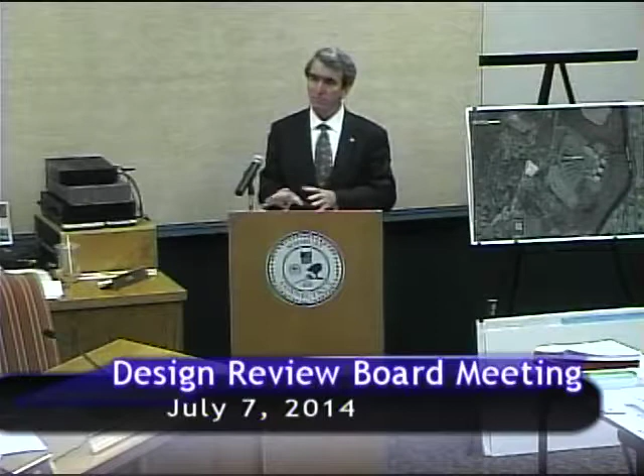I think what's critical in this proposal is Mr. Evans's attempt to retain the old pool barn store as opposed to just taking it down. Dale has spent a lot of time with the architectural design, and he'll walk you through that momentarily. We've come up with a proposed mixed-use development utilizing the PAD section of the zoning regulations. But to really make it work, the Cumberland Farms component has to go with this, just from a financial sense, otherwise we wouldn't be able to preserve the pool barn store. I just wanted to preface our presentation with that, and with permission of the chair, I'll turn it over to Guy Hesketh. Thank you.

Thank you. Is that okay to have this set up here? Sure.

Good evening. For the record, my name is Guy Hesketh. I'm a licensed professional engineer with F.A. Hesketh and Associates. Our corporate offices are located in East Granby, Connecticut, and we helped Tom Evans with the application package and the plans that you have as part of that package.

What I'm showing here on my left is an aerial photo with the site overlaid on it. You can see the colored portion is the site plan, which I'll show you on a larger scale in a minute. It's located on Hopmeadow Street.

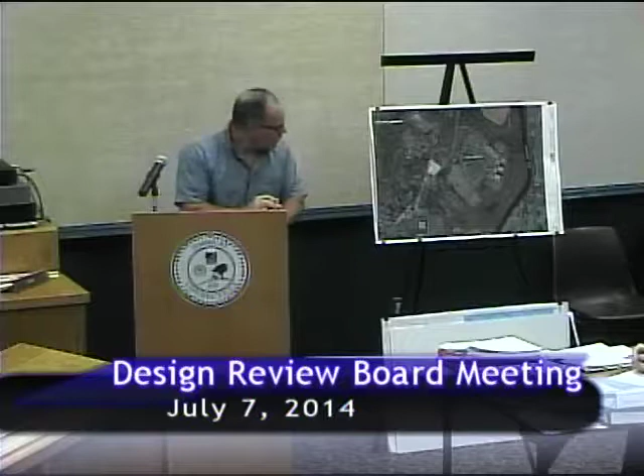It's on the site of the former pool and patio barn that was in operation, I don't know, maybe up to 15 years ago or so. Behind it is the Farmington Canal Heritage Trail, the rails-to-trails, so you can see that in relation to our property. We're sandwiched in a sort of triangular piece between the trail itself and Hopmeadow Street. I'm showing the Hartford across the street from us; you can see the scale of that. The Farmington River is located further to the east of our site.

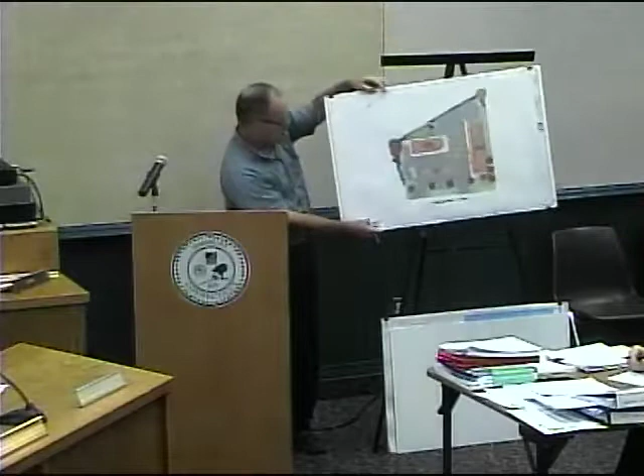North is not directly, but roughly upward on the page. So that gives you the scale of our project relative to the neighborhood and our location. I've got a rendering here at a little closer scale of the site. It's 155 Hopmeadow Street, a total of 1.87 acres. It contains the pole barn building, located here. Currently the site is cleared, with some gravel parking areas in front of the pool barn and a little bit around the back.

There is a drainage swale which runs around the property. It picks up some runoff from Hopmeadow Street, goes between us, and there's a synagogue located here to the south, and kind of circulates around the site along the western edge of it, I guess you'd call it.

That ditch was probably part of the former railroad, and it was incorporated into some storm drainage that the DOT uses to drain runoff from Hopmeadow Street and go around the site. And then, of course, the rails to trails, the Heritage, Farmington Canal Heritage Trails, is located right here.

What we're proposing is to do a restoration of the pool barn building. In addition to that, I have a new convenience store located here, and then a proposed canopy for fuel dispensing.

The existing pool barn, we're proposing 2,400 square feet of retail with up to 3,320 square feet of commercial, and that would be a combination, Dale will explain that in a minute, of this portion of the building, which will be mixed use. It could be a combination of apartments or some type of studio apartment with some space downstairs, whether commercial, office, retail, artisan type of thing.

One of the things counsel will talk about that we're requesting in our application is that the maximum width be allowed to exceed the 30 foot at the property line and the 40 foot at the curb line, in order to accommodate the radii transition required between the driveway curb line, which is this line here, and the curb line on the state highway.

And we would leave that because this is a state highway, these applications will require review by the Connecticut Department of Transportation, and it's at their discretion from a public safety perspective what radii they want. So we're asking to allow the transition for the radii. We're requesting up to 60 feet on our plan, showing widths of 35 and 45 feet, which we believe are adequate for the DOT.

However, this gets flushed out in the encroachment permit process you have with the DOT. Unfortunately, they won't do a review until there's action taken by the town. Once that's done, we will submit those to the DOT.

We are proposing paved parking areas on the site. You can see them shaded in gray. There's also a couple other little amenities that we have here.

Cumberland Farms has in this location an air dispenser. They're required, when they sell fuel and have this type of service, to provide air for tires. They're going to have a small box located at the edge of the parking area and a crosshatch area that will allow patrons to come in free of charge and use the air if they need to put air in their tires.

We're also providing, and showing on the plan at this location, some electric recharge stations for electric vehicles. We think in reality they'll end up located somewhere on the site, but for purposes of showing we're committed to having electric recharge stations, we're showing a location on the plans. That's something a lot of towns are starting to lean toward. It's not specifically required by your regulations, but it is a best management practice, and the applicant wants to do what's right for the long-term future.

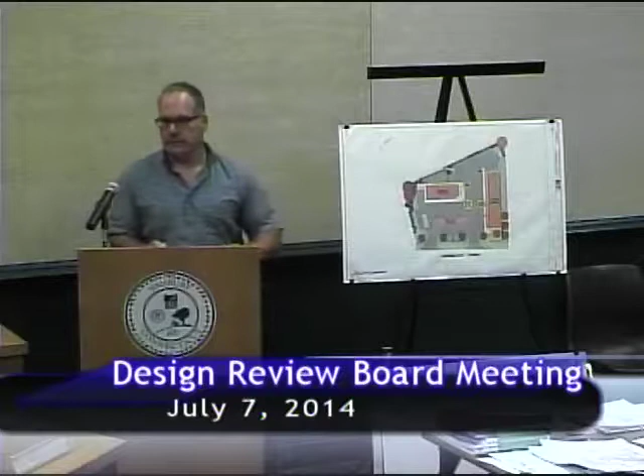Regarding stormwater management facilities on our site, we have a number of catch basins located to pick up runoff, which will be captured in an area we're calling our water quality basin, located behind the facility. It's shown in more detail on the grading plan as part of your package. What that does is receive stormwater runoff, then throttle it and discharge it at a reduced rate into the intermittent water course located behind the property. That basin is sized to capture and treat the minimum water quality volume.

As part of our stormwater management system, we're also locating, in this area and another area here, hydrodynamic separators, which are concrete structures designed to do two things. They capture and settle total suspended solids to meet the 80% total suspended solid removal requirement or recommendation of the Connecticut DEEP. In addition, they have the ability to capture and contain floating product, including hydrocarbons, from any of the areas of the parking lot. So it's designed to handle those types of things.

There's a number of erosion control devices that we're proposing as part of the project. I won't get into detail on those unless you have specific questions, but those are shown on the grading and sedimentation erosion control plan, GR1.

We've also included in our package some site lighting photometric analysis showing the type of lighting we're proposing. There are a number of perimeter lighting fixtures at a 14-foot mounting height, and pedestrian level lighting at a 7-foot mounting height. The other lighting proposed for the site is the canopy lighting - a number of fixtures under the canopy designed to provide lighting immediately under the canopy for better visibility during fuel dispensing. Also, immediately under the walkway canopy for the main store entrance, there are some canopy fixtures. Details of those fixtures are provided on the sheet included as part of the lighting package.

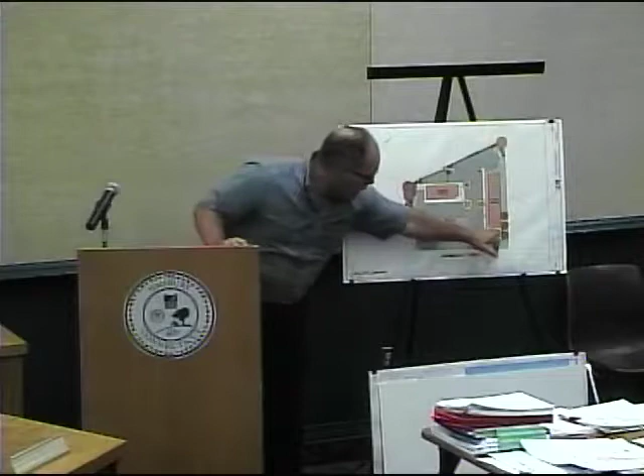And then Mr. Cutler designed an area here - an outdoor patio area. The existing pole barn building extends into this area, and we would be removing a portion of that building. We anticipate a portion of the foundation would remain, and there would be a garden patio area located here in the front. We don't have exact species of plantings for that area yet, but the perimeter vegetation we're showing on the plans, along with species lists, is included in your landscape plan.

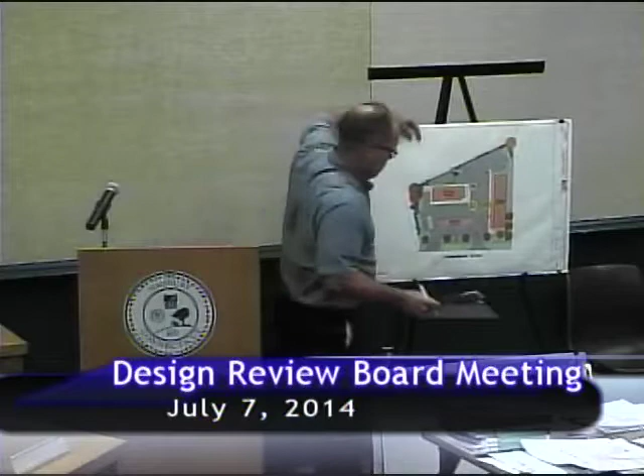This is the only way to rescue the farm, like having a gas station next to it. I don't like having the gas station next to the farm. This is the only way to rescue it. That's what I...

Good evening, for the record my name is Dale Cutler. I'm a partner in the firm Kenyon and Cutler. Our offices are in Avon.

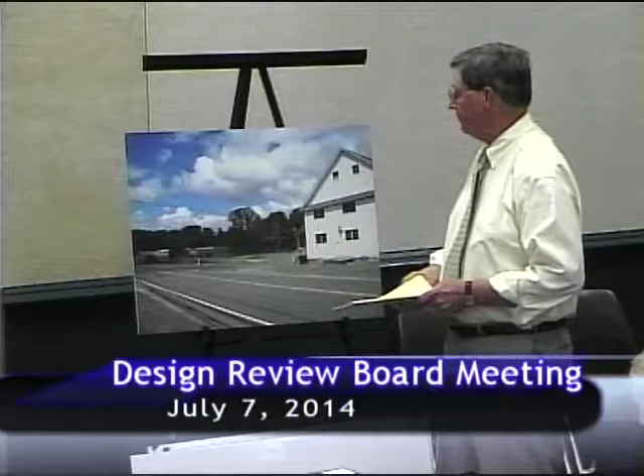My primary responsibility on this project has been the adaptive reuse of what we all call the pole barn. The structure was actually built in 1911 by American Sumatra Tobacco, and it was one of their primary warehousing facilities. The cured tobacco grown in the Simsbury area was brought to this building after it had been cured in the sheds, and here it was made ready for shipment over the rail, given its location next to the railroad. The building itself, because of its nature as a warehouse, is very, very sturdy.

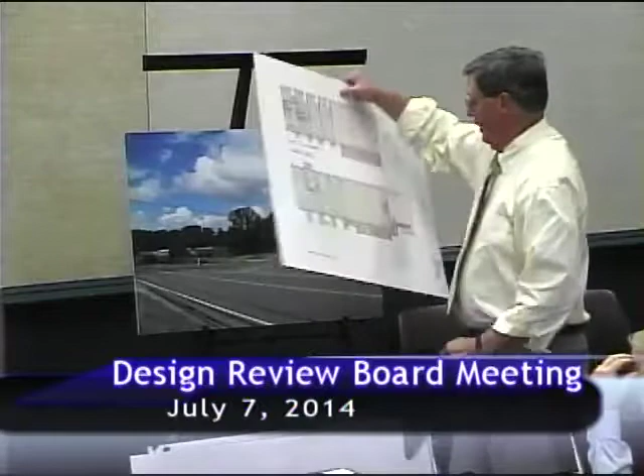The interior structure is a very heavy timber frame. This is actually the first floor plan. You can see the columns are located 10 feet on center. This building will hold like 400 pounds a square foot. It's built like a tank.

One of the nice things about it is it's been fairly well preserved over the years. The exterior skin has been kept intact, so although it's over 100 years old, it hasn't really suffered much from the weather. Part of that is because Mr. Evans has used this for storage for some of his collection, which is a very eclectic collection. But because of that, it's a very secure building, and it really lends itself to the adaptive reuse we're anticipating here.

As Guy mentioned, the existing building, which we're all familiar with, is about 4 feet from the highway taking line at the front wall. That creates all kinds of situations, not the least of which is a very bad sightline coming from the north. It really does mask anything, entrance and exit to the site, and makes it kind of an unsafe condition.

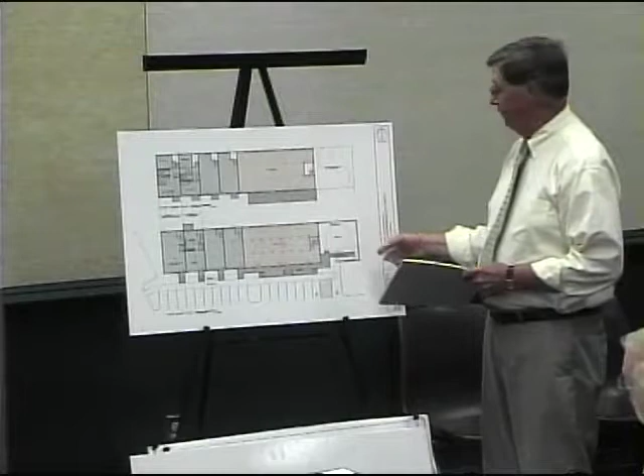So the intent of the proposal here is to remove the first 4 bays of the building, or 40 feet, which is from this point to this point. If you go out there and look at it, it's the portion that has the porch on it now, so that will help you imagine how far back it will be set from the road.

But also, as Guy mentioned, we're going to retain the existing antique brick foundation that occurs there and actually use that as a garden wall. I think that'll be a very nice feature as an adjunct to this. It could be an adjunct to some of the uses within the building, or could be used independently, related to the bike trail.

The use of the building, again as Guy mentioned, the eastern portion of the front towards Hopmeadow Street, half of the building, is intended for retail uses, either a single tenant or multi-tenant. We've provided handicap access with a ramp and a covered porch out front. The other portion of the building is really a mixed use, a combination of commercial office and residential in this half of the building.

On this plan, which I think you have copies of in your folder, it shows a couple of different ways this could be developed. As we take one of these bays, the initial thought is that the lower floor will be devoted to either a commercial use, like an office or an artist studio, or a number of different uses. The upper floor, as shown here, is a one-bedroom apartment, with the whole thing held in common ownership or common rental.

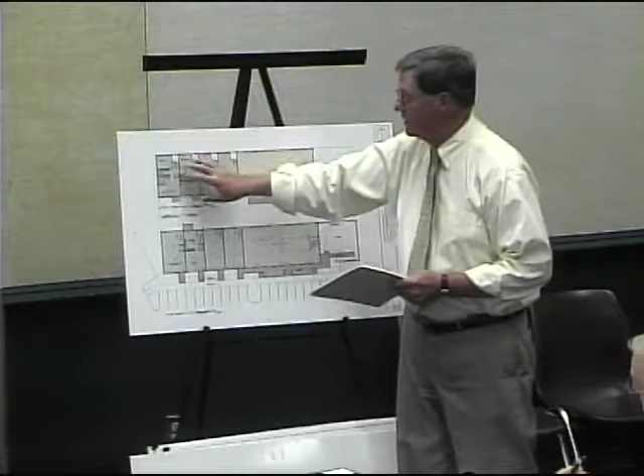One of the other alternatives is that we could take that same 20-foot by 40-foot footprint and turn it into a very nice two-bedroom townhouse as 100% residential use. Either of those two uses, whether commercial office with residential above, or all residential, are adequately supported by the parking shown in the proposal.

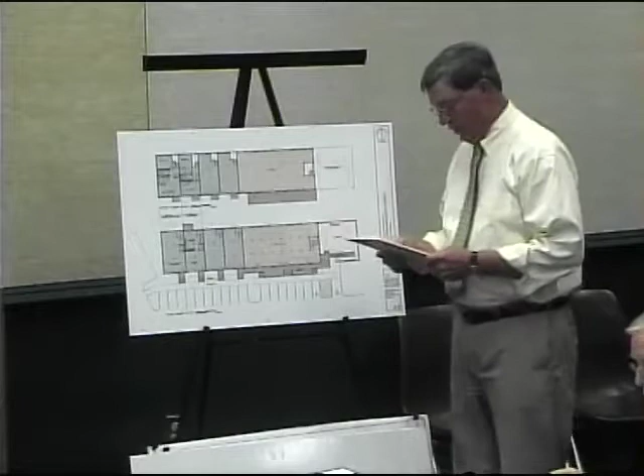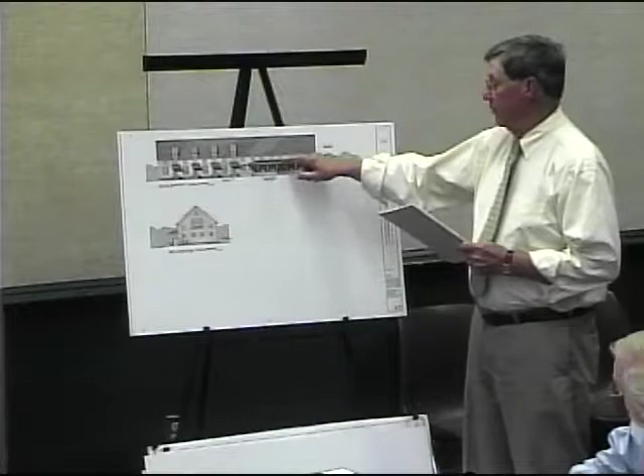Major materials: there is an existing fiberglass shingle roof that'll be retained as much as possible. The roof over the retail section would probably be a metal roof. I'm showing it here as a dark green metal roof. The general material on the exterior of the building would be horizontal lap siding, more likely than not a fiber cement product, which is what everybody's using these days, because of the durability, and probably pre-finished, which gives a nice lifetime warranty on that finish.

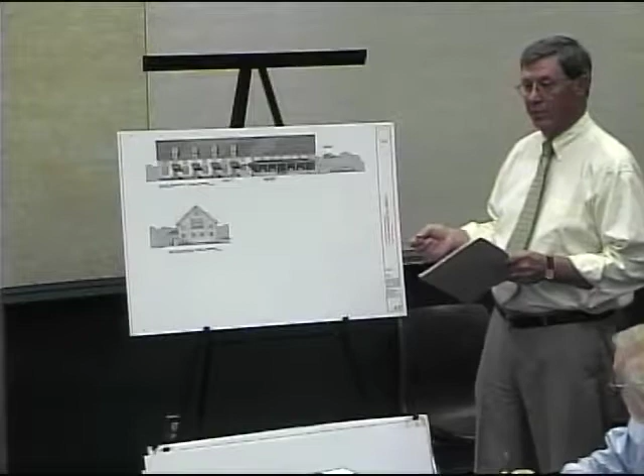So I don't know if you have specific questions with regard to the barn design. I'd be very happy to answer them, or we can move on and show you the proposal for the convenience store. Okay, why don't you move on, and then we'll ask all our questions at the end.

Just to segue into that, we did have prepared a rendering. This is the new end elevation of the pool barn. This is actually the terrace area that we talked about towards South Meadow Street. That's an accurate representation of the canopy that's being proposed.

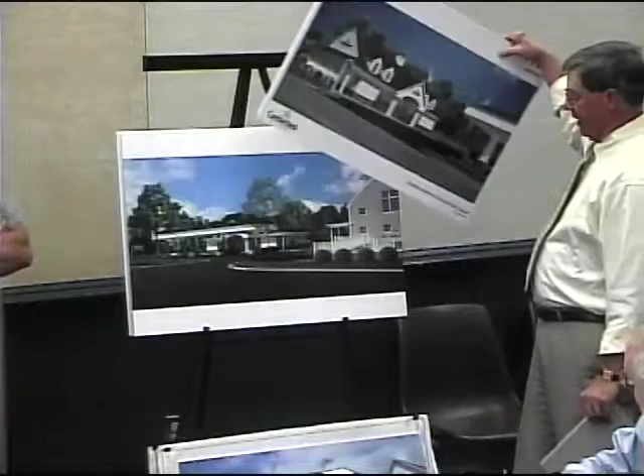This is a representation of the convenience store. That gives you a real good idea. It's kind of a replay of this, so that gives you a proposed before and after. A little bit better illustration of the Cumberland Farms, which was not our intent in doing this rendering. Our rendering was trying to show accurately what it would actually look like. This is obviously rendered to scale.

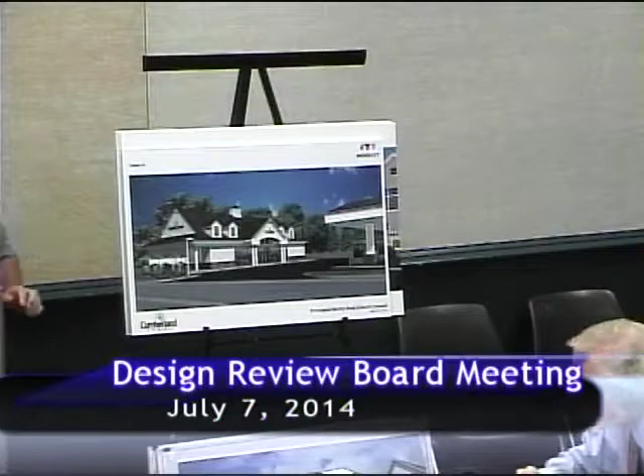It shows some of the features being discussed: the low stone wall, the lower profile Cumberland Farms sign. But actually, Cumberland Farms prepared this rendering, which is their prototype, looking from the other side. So that gives you a little bit better rendition of what the actual convenience store looks like.

That's more specific. Yeah, this is a specific design that they put together. You have copies of those in your package.

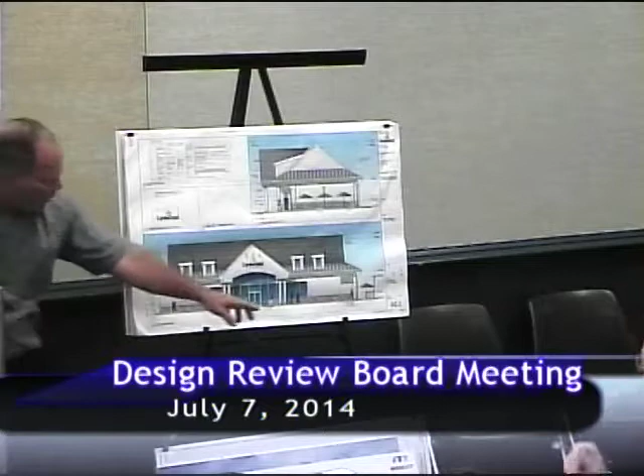Real quickly, I'll go over these. This would be the front elevation as you're looking at it from Hopmeadow Street. The main entrance would be located here. On your plan, you see a little patio area on the north side, depicted here. There'll be some seating, umbrellas and stuff. The idea is to make that pedestrian friendly, to provide an interface between the walking path and the store itself.

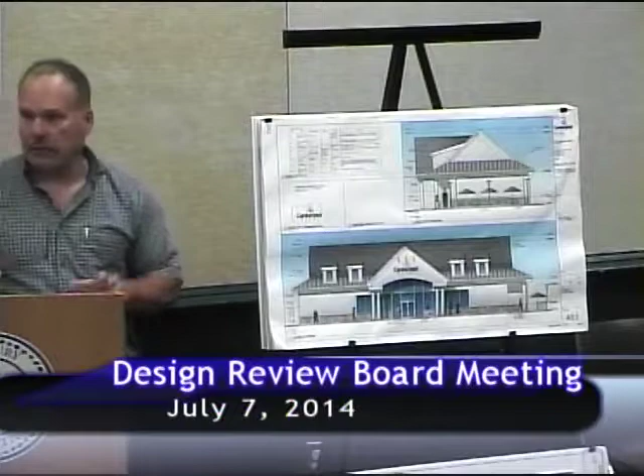But looking from the sidewalk, what we're looking at is a stone facade to a 3-foot elevation located here, and that would be a color scheme of brown, gray, like you see here. That would have a water table just above that, and then the rest of the elevation would be a vinyl clapboard material, 4 inch to the weather, light gray color. Synthetic wood trim would be located for the trim details.

The one band here closest to the vinyl siding would be a green color, similarly, as Dale showed on the canopy itself, you'd have that same color scheme on the canopy. And then you'd have gutters and downspouts on the building that would be white. You'd have some additional trim, which would be a gray material up to the roof line itself.

Then there's two kinds of details for the roof. That small band of the flatter portion of the roof would be a standing seam metal roof here, and then the rest of the roof itself would be an architectural shingle. Then they're proposing, they took a look at Dale's plan, and instead of the gable type of dormers that you see here, they'd be looking at shed dormers that would match the style proposed for the pool barn building.

And then again, there's a gable entrance feature here, which would have some columns located here, provided with 3-dimension in here. Their sign would be located in the front facade with a gooseneck type of lighting that would illuminate it from above, and those would be white fiberglass column sleeves located here as part of that.

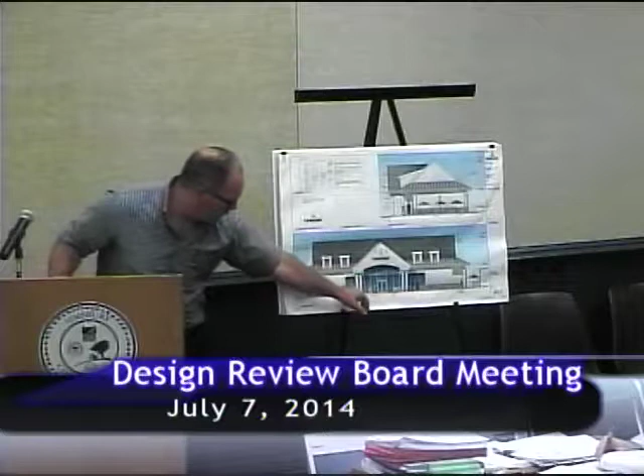And again, I mentioned about the sign. The wall we're showing out front on that other landscape plan, our intention would be to mimic what we see here, so there'd be continuity there. And the freestanding sign has a stone treatment that would incorporate the same materials utilized as part of the building. That's it in a nutshell for the Cumberland Farms building.

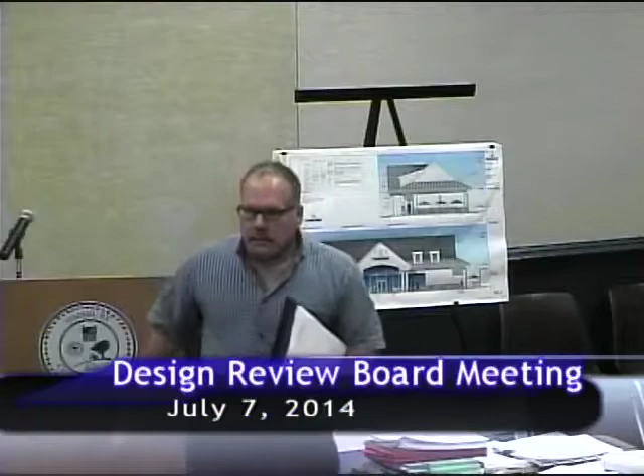Well, I'd like to first say, I think it's great that someone's finally doing something with that pole barn building. I'm sure everybody here drives by it all the time, and my vision was this beautiful restaurant right on the end, farm to table, overlooking the tower, an amazing chef restaurant, but that's okay. Retail will work too, maybe it'll be a good store.

So that's good. I have a couple comments about the site plan, if you guys don't mind, I'll go first. The water quality basin in the rear, what exactly is that? Is that just like a water holding pond that has a black chain link fence around it? I'm a little concerned that it's right on the path. So you're going to bike past this 4-foot high black chain link fence, and there's just sitting water in there?

No, it wouldn't be sitting water. Water would be in there only after a storm. So when there's no water in it, what is it, just like a hole?

One thing I wanted to mention is that we did get wetlands approval for the regulated activities associated with this, which would include this particular item that Guy's about to address, within the upland review area, because there's an intermittent water course along the southerly side of the property, and then traveling on the westerly side in a northerly direction. We did get a copy of their report, so we saw their approval and their concerns and comments. Okay, but I'll let Guy respond.

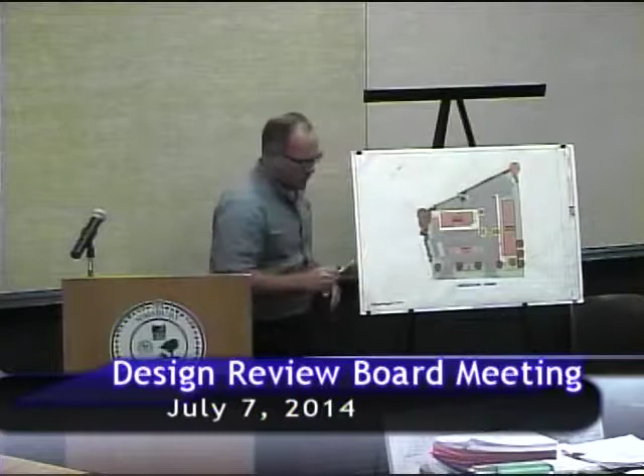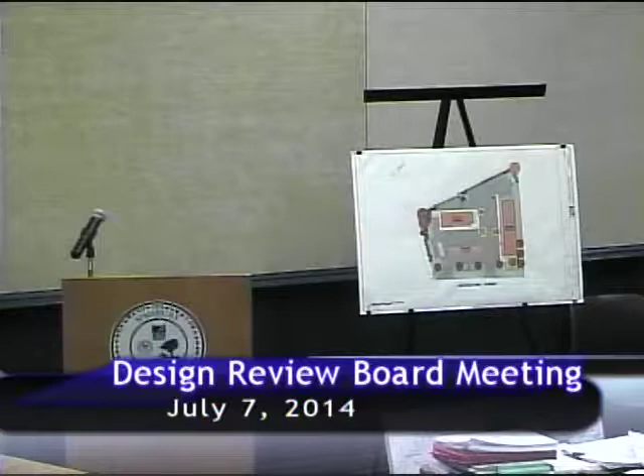Well, what it is, there's actually a block retaining wall located around this. The finished grade elevation in this area is an elevation of 307, or 107 -- excuse me, let me grab my plans to verify that. But what it is, it's a 3-foot high concrete masonry unit, keystone wall type of feature, and the fence is on top of that. So it's an area that's depressed below the existing grade to match the elevation of the water course behind it. So what you see is a 3-foot high block wall with a 4-foot high fence on top.

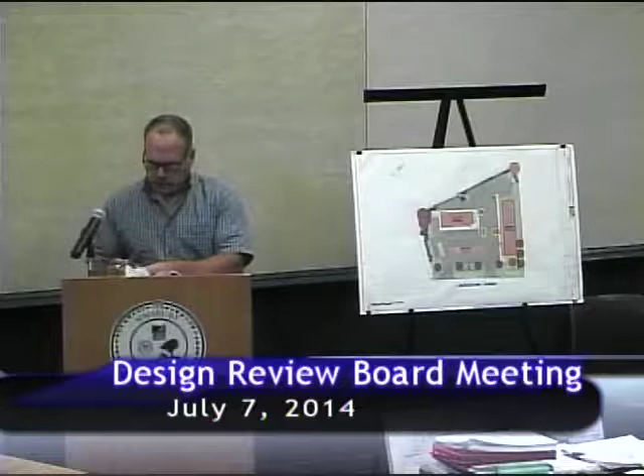Yes, so if you're coming from the path, that's what you would notice. And what it's designed to do, the volume of that is designed to handle the amount of runoff coming from the site. Typically what you try to do is design a site to handle capture and treatment of 1 inch of runoff over the entire site, and that's sized to do that.

Is there any other form of fencing we could use there, something that looks a little nicer than black chain link or block? I mean, if we're doing all this to make these nice brick walls, and the amount of people on that path... What did you have in mind? Well, I don't know, could you use a white, or not maybe white, but a wood slat fence or something a little more... Yeah, the thing is, you want to be able to visually see inside it, so you don't want to create a barricade where you can't see inside, because from an operation and safety perspective...

So how do you get in there? There would be a gate that would allow you access to it. But you need to be able to take a look at it and see in case there are some issues that need to be dealt with, for maintenance and things of that nature.

Maybe there's some other material that would be more pleasing to the eye, if we'd thought about it during initial design. But it's interesting - it's not much different than the ditch that runs along the entire portion of the railroad here. The ditch is the same elevation, about a 4-foot difference, with fairly steep banks.

But there's no fence there, right? Correct, it's all natural. Well, it's man-made, not natural - it was designed as a drainage feature. When the railroad was built it was excavated, and when the DOT did their work it was excavated again. So it's a man-made feature that runs the length of the property.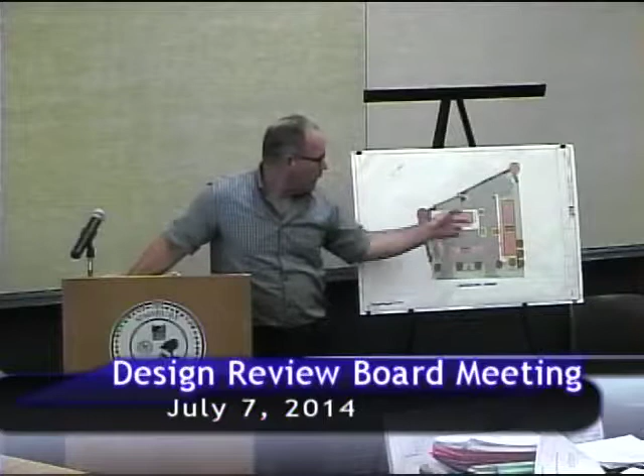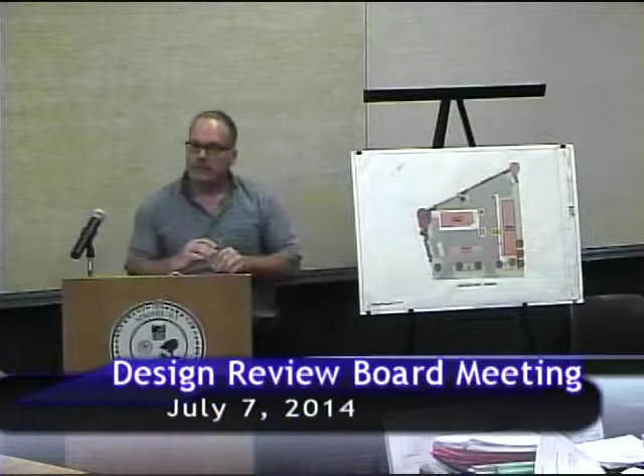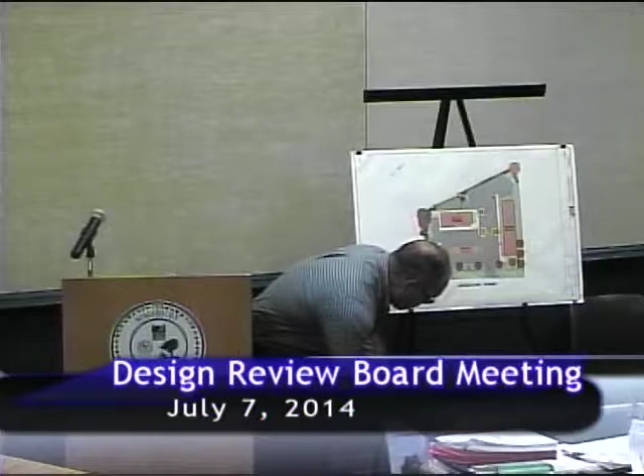So the elevation difference on top of that bank compared to what we're looking at is really the same - we're limited to the elevation of discharge, which is the bottom of the ditch itself. I'd be interested in seeing an elevation of that rear facade, the back of the building with that fence, and what's proposed for the back of the building. I have an elevation of the back of the building, but not one that shows it with the fence.

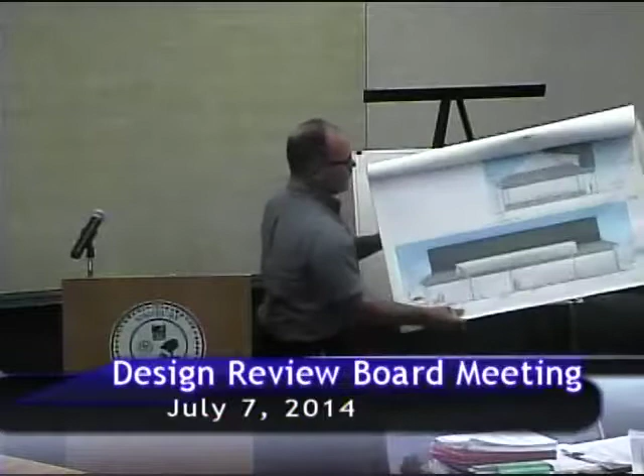The back of the building - the mechanicals will not be ground mounted, they'll be mounted on a shelf and protected by fencing material.

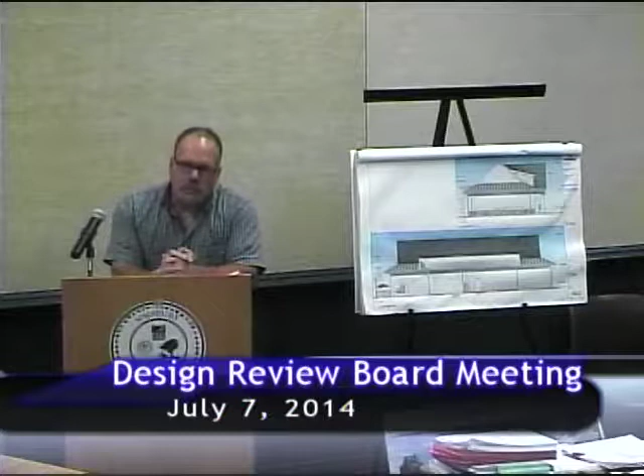What you'd have is in this area here is where the water quality basin would be - you can envision it in this direction. And along those same lines, the dumpster - is that going to have any fencing around it or be shielded? Yeah, what we're proposing is a vinyl fence material that's opaque, enclosing the entire dumpster area.

So you would not be able to see the dumpster? That's correct. And that's not from a safety perspective - it's okay not to see the dumpster. But it would be a steel frame and vinyl fence material, and it would be closed unless the dumpster was being loaded for disposal.

From a safety perspective, you want to be able to see it and do something about it. So who's going to check the storm drain, this basin - the owner of the Cumberland Farms?

Part of the operation of the facility, it'll be looked at after each storm. There's a requirement - one of the conditions of approval from our Conservation Commission for the wetlands - there's a maintenance schedule and stormwater management practices followed, and subsequent to each storm there's an inspection done.

And to take a look at the electrical boxes on that corner - or meters? Yeah, that would be the utility connections in the back.

My only concern is that's where all the people are going to be coming in off the trail, walking right to the thing. Are there going to be bollards in front of it so somebody can't go up to it, or could it be on the opposite side near the dumpster?

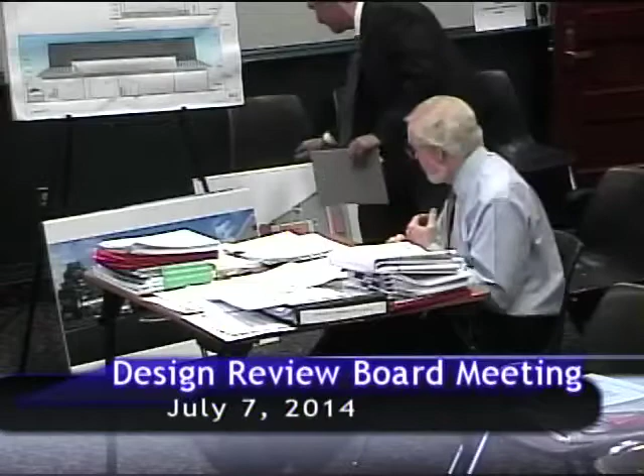The Conservation Commission wanted to see the basin, but I think it brings up the same questions that the chairman just raised as to what's it gonna look like and how's it gonna function. The town engineer is comfortable with the fact that the coverage that's shown is able to be treated here. He's comfortable with that. Whether the basin is aesthetically pleasing or not, trying to dress that area up and obscure the less attractive aspects of it is really what we're talking about now. But the coverage does work with the stormwater calculations that have been provided.

That's all for me. For me, what, do you wanna go next? I'll go next, because I have to take a little bit different tack.

You're all familiar faces in this room tonight, and I'm sure you realize that this board makes its recommendations basically based on the guidelines for community design. Let me draw your attention to page 11. I'll read it to you, I'll read the opening part of it, because to me this is very important. This is, the title of this is Circulation, Vehicular and Pedestrian.

Does the site design provide vehicles and pedestrians with a safe, logical approach and entry to all site use areas and buildings? Is equal importance given to the pedestrian as to the vehicle in terms of comfort and access? In looking at the site plan...

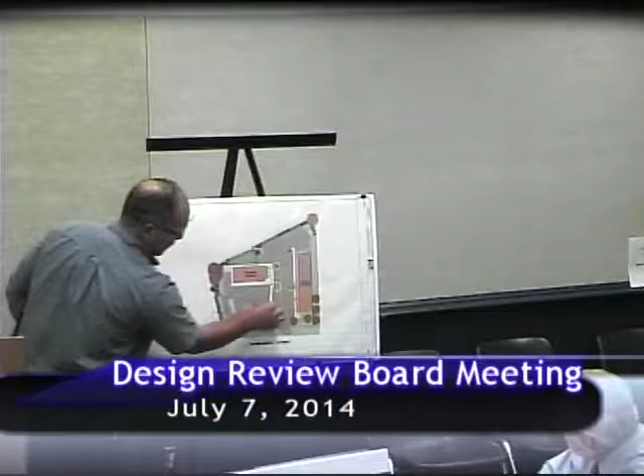Well, I understand that. The circulation that you're going to see for people utilizing the convenience store is they're going to focus on the parking spaces located from here forward. The average stay in a convenience store is typically 5 to 10 minutes, pretty quick. Most people who dispense fuel will actually utilize that as a parking space, go in, come back out, and leave from that same space. So it's a high turnover use for a convenience store.

We recognize that. That's why we biased all of the parking that would be required as part of this in this direction, in the front of the store. The bulk of the pedestrian traffic will obviously come from the pathway itself.

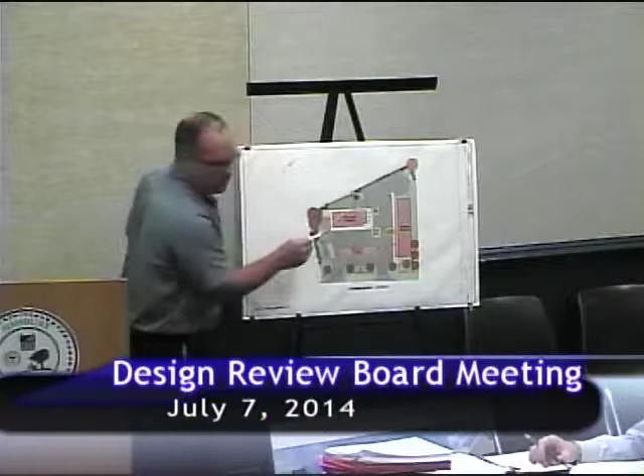What we provided for here are 3 parking spaces. We anticipate those to be employee parking spaces, so they're not a high turnover space. When the employees for Cumberland Farms come here, they would be instructed to park in these spaces. Employees for these other uses would park in this area, and if the residences are approved, these would be the spaces for the residents.

So the spaces in this area are not a high turnover space. If it's an office, like a real estate office, you're not going to get a high amount of traffic. Somebody might come in for an hour or half an hour or so, pull in, just like any of the other smaller places located around town.

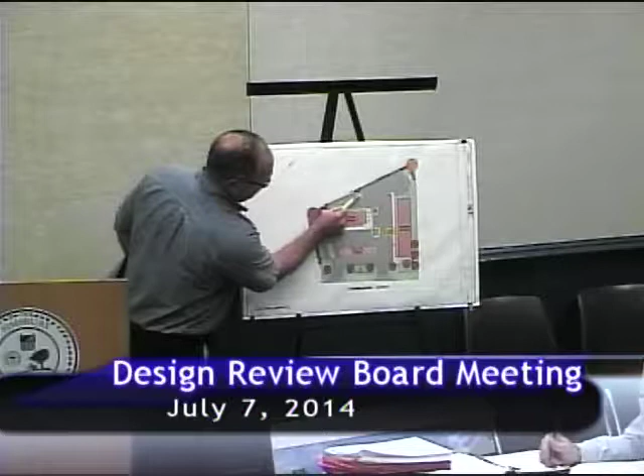But the pedestrian route would be here with the crosswalk, and we're providing a bike rack in this location, underneath the tree, with the intent that people who utilize this would come in, access the store through this doorway. These are where the bathrooms are located, and their purchases would be made, and they'd enjoy this area for refreshments and things of that nature.

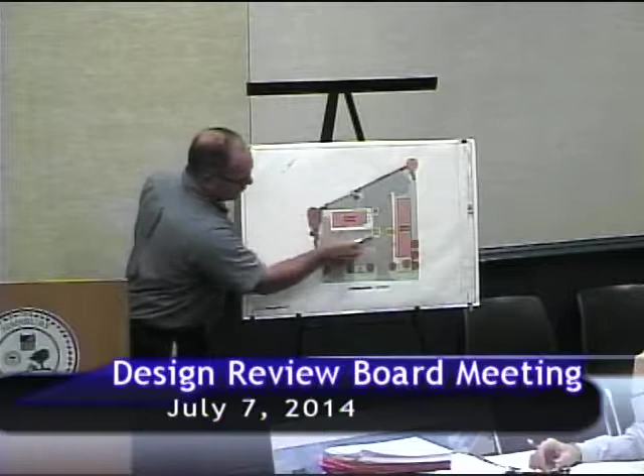So we don't see a conflict from that perspective because we're not encouraging people to come in. For example, I'd be more concerned if there was a pedestrian path up here and people were accessing the site through the main traffic flow. But the idea is that pedestrians utilizing the path would stay in this area of the site, providing safe access so they're not involved in crossing traffic. The only crossing traffic they'd have would be in the dedicated employee spaces, which again is just 3 spaces.

So is there a way you could relook at that back layout so they can get from the path directly to the sidewalk without going into the parking lot at all? I mean, you could push the parking spaces over and come in along the water quality basin, keeping the pedestrian path completely out of the parking lot. Take a look at that—it might address one of John's concerns, that they're not coming off a path into a parking lot, back onto a path, even though it's employee parking.

No, excuse me, but that's not my concern. My concern is kids are kids, okay? And you'll have kids all over the place. They will not confine themselves to where you think they will.

Again, it's my opinion. You could have that concern anywhere, though. It's my opinion that the plan itself does provide for safe and adequate access to pedestrians. Well, again, I appreciate your opinion, I have an opinion too. I suppose you could make that argument with kids around the center of town coming here and stuff like that, but again, I think our plan provides, in my opinion, for adequate protection.

Your plan is very attractive, okay? People will look at it and say, wow, that's great, we can come down and have a cup of coffee, and the kids can come down and have a soda, and use the restrooms. The question in my mind is, is that appropriate given what goes on at the property? That's all.

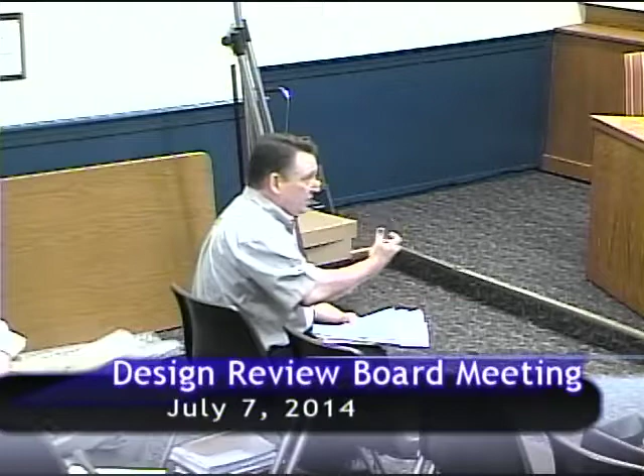And it's zoned industrial. Currently it's zoned industrial. It was used for light manufacturing. They assembled guns there at one point in time. It's actually a rather neat building.

Being active with the Planners Association and going to all the national conferences, seeing what's been done with some buildings, I mean what Tom is proposing to do with this one - it's like being in a football field and just looking from one end to the other. It's pretty neat, and to be able to divide it up like this, as Dale's proposing, it just will work.

The question here, first of all, I attended the informal presentation that you folks made, and if you recall we had the same type of reservations, not so much the safety part, but at that time the gas station operator wasn't identified. But if you recall what we said about the gas station per se, basically it was okay. The architecture was okay, and as a gas station, pretty good.

We had concerns about how the use of the gas station would affect the use of the building of the barn, and how the use of the barn would affect the gas station. I tried to get the minutes today of that meeting, so I'm taking this from a very vague memory.

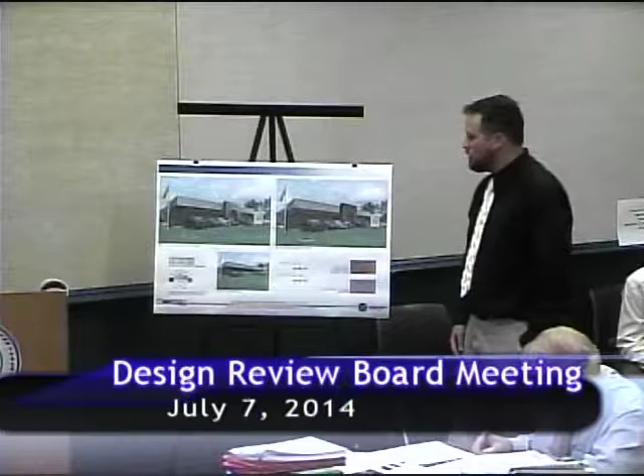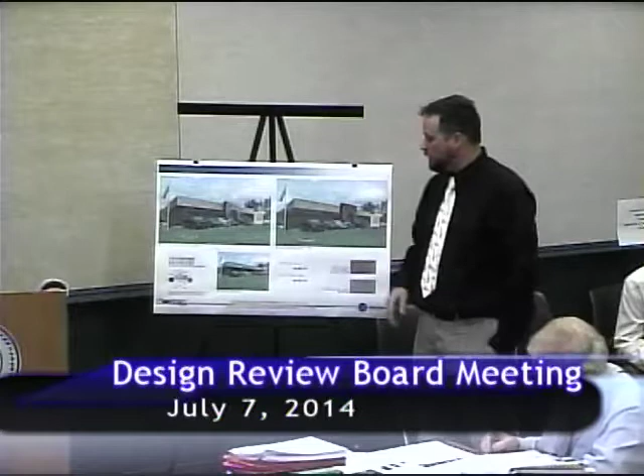We're trying to apply that Chrysler prototype to it. With the options, we've done two things. The first, the Alucobond, we're taking the existing soffit or fascia and wrapping it with metal paneling, and then Chrysler also requires this Millennium Arch, which is part of their prototype.

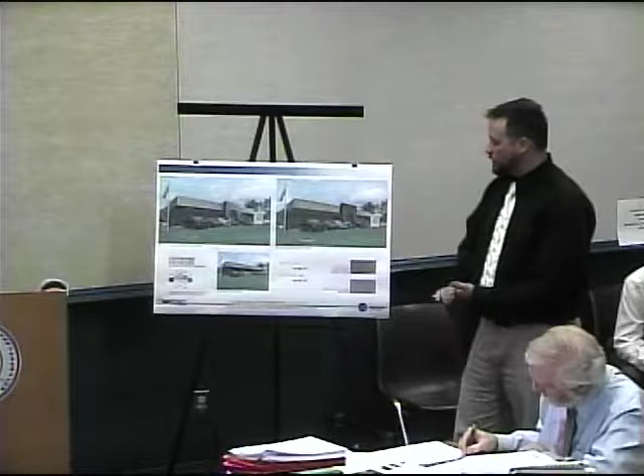The arch is something that would come prefabricated. There are different manufacturers out there that can build the arch off-site, and it's very simple—it can come in and just set down on the footing. The arch has different proportions, and this building happens to have the smallest arch proportion. There are arches out there of different proportions where they're 30 or 40 feet tall, but at this location I believe the arch is only 20 feet tall in relation to the building.

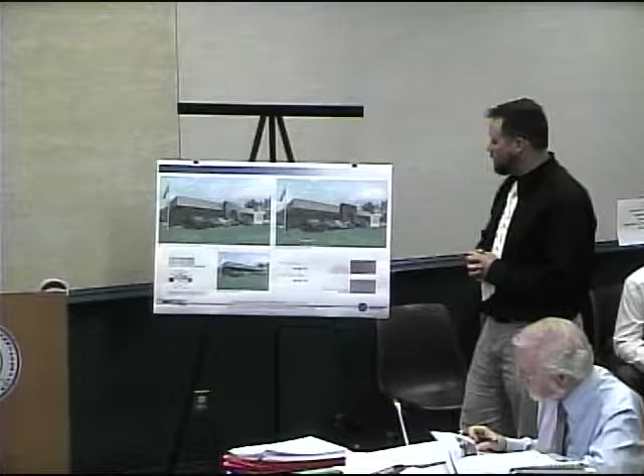The second option is a little more traditional. We've basically kept the existing fascia that runs along the building and plan on repainting it. The idea is to keep the arch as well, but instead of cladding it with Alucobond, we would clad it in a brick veneer, making it a little more traditional. We thought the painted existing cedar fascia and the brick-clad arch is more in keeping with Simsbury's design review qualities and characteristics.

So you would just paint the existing board? There's a cedar board and batten veneer on there. We would obviously scrape off the existing paint and repaint it. As far as the colors, it's something we can certainly review and discuss. We just thought a simple buff color would work well for now.

Another element to discuss tonight is not only the building, but also some signage. Right now you can see in this sign that there's an existing Dodge sign. Part of this process is so the franchise can not only sell Dodge and Chrysler, but also acquire Jeep as part of their franchise to sell new Jeeps. With rolling out another product, that's another reason why they need to upgrade their branding and signage on the building.

So there is a small monument sign that's part of this. And I'll flip to the next page.

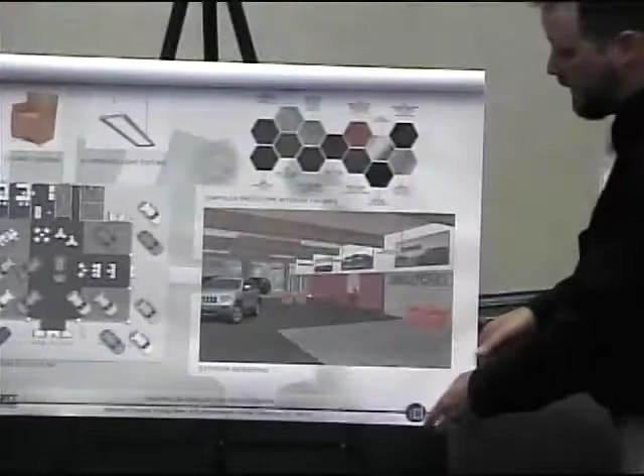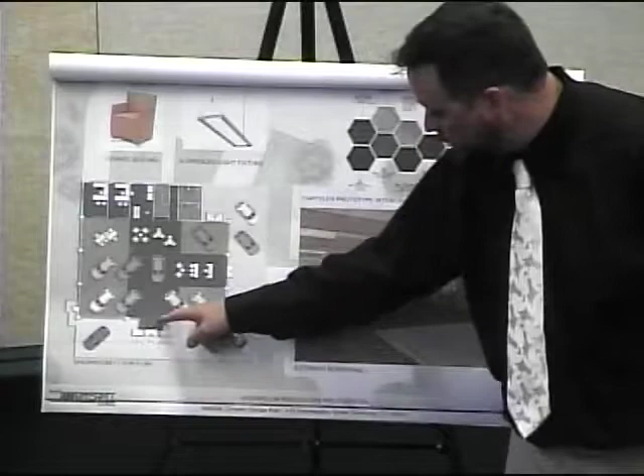This one is basically a floor plan layout. It's all mostly interiors, but the reason I wanted to show you this is to show you the location of the Millennium Arch. Right now this rectangle here is the existing showroom. The Millennium Arch would add a small extension to the front entrance door, right in the archway. This plan just shows how deep that arch is and how wide it is in relation to the floor plan.

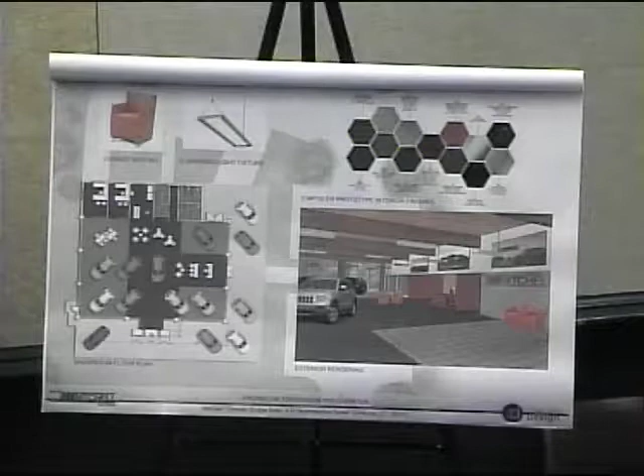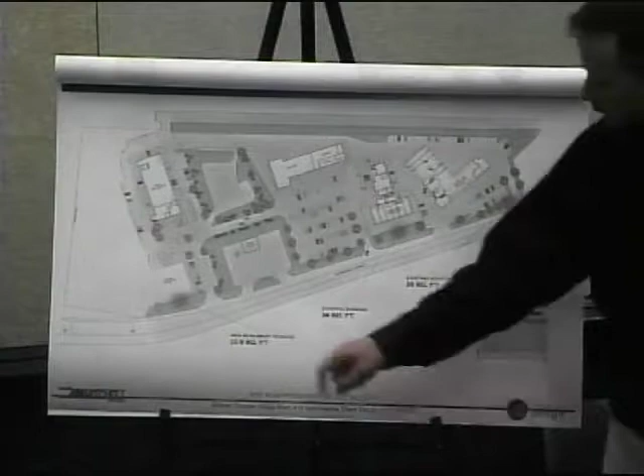And then the final plan I have is a site plan. We created this more for a discussion of signage. Right now there are 3 monument signs as part of this complex. One thing to note is that the complex is divided by the existing Mobil station, which is not part of the property. Right now the Dodge showroom is over here, which is where we're proposing to replace the monument sign. The other 2 monument signs are existing, and we didn't touch those at all.

And lastly, we did provide an elevation, which is the prototype from Chrysler, their signage and the proposed size. How tall is the sign? The total height is 10 feet, and that's the smallest sign that Chrysler provides. The square footage of the actual sign area, based on the specifications given to me, is 33.9 square feet.

Is that the service shop? Which one, the Volvo shop? Volvo, right, that's brick over here. That's brick, correct? That's correct. Is the whole showroom brick also? Yes, I believe so. This is totally in keeping with the existing design.

For the record, I'm Steve Mitchell. This really is in keeping with the design that exists. We're getting pressure from the manufacturer to have this arch and this look, it's called the Millennium look. I don't object to that.

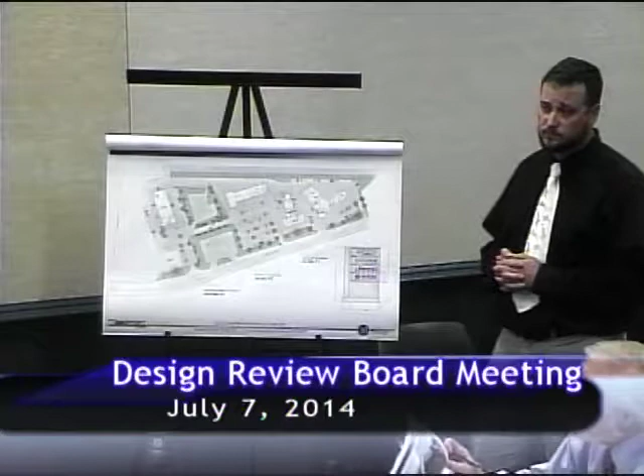What I'm thinking is, with your sign, if you use the brick arch and add brick to the base of your sign, it ties the whole group together. Yes, using brick as opposed to aluminum. That's what I mean. I agree, I vote for option 2 as well. The brick is more fitting, and if they'd let you put brick on the base, I think that'd be even better. I think this sign is their prototype, so it's more in matching with the first prototype that I was showing you.

Well, this is informal. And for the record, as of tonight, we are the second auto dealership in the state of Connecticut to go solar. So what you've seen us doing the past 2 to 3 months with the panels down there is actually going live tonight, the first test. We're trying to be progressive, but trying to keep in character with Simsbury too.

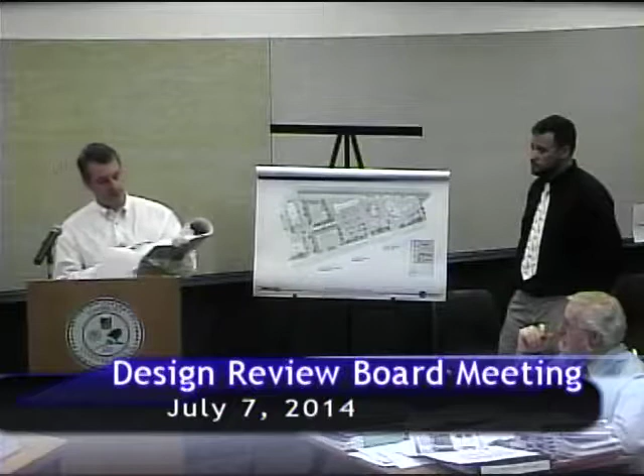Allow me to be somewhat blunt to move things along. The issue at hand is that the Chrysler dealership is putting pressure on Mitchell's to go in this direction. However, to allow them to move in a different, more architecturally pleasing direction, some form of motion or feedback from you, memorializing this, can go to Chrysler. This is necessary to allow us to move in a different direction. Otherwise, they will continue to press that the Millennium Arch and the Alucobond aluminum be followed. Is there some means the Design Review Board can provide, as opposed to you presenting something that we'd have to say doesn't meet our standards?

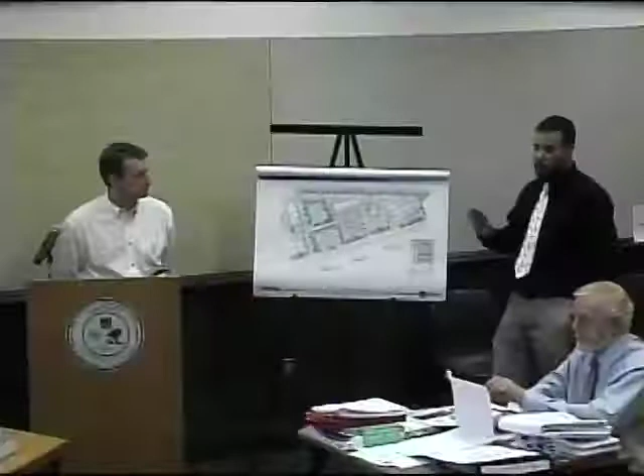Is there additional signage proposed for the building itself, other than the Mitchell signage? Right now, no, there's no signage on the front face of the building. The only signage we're proposing is the Mitchell branding over the Millennium Arch.

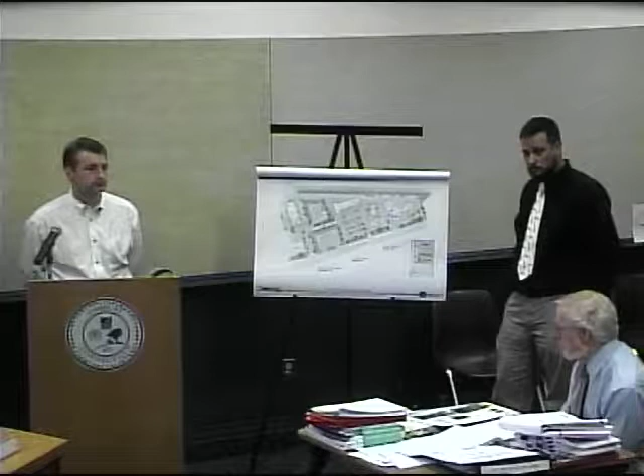What's the process for that, Hiram? Should the board decide, and I think you've indicated the brick option is the way you'd like to go, we're prepared to put together a letter for the chairman's signature indicating all the options you've looked at and the direction you'd like to go. The only thing I'd like to say is I need to make sure before final approval that the sign sizes comply with regulations, so we may need to tweak that a little. But I don't think there'd be any difficulty putting together the letter that Matt's looking for.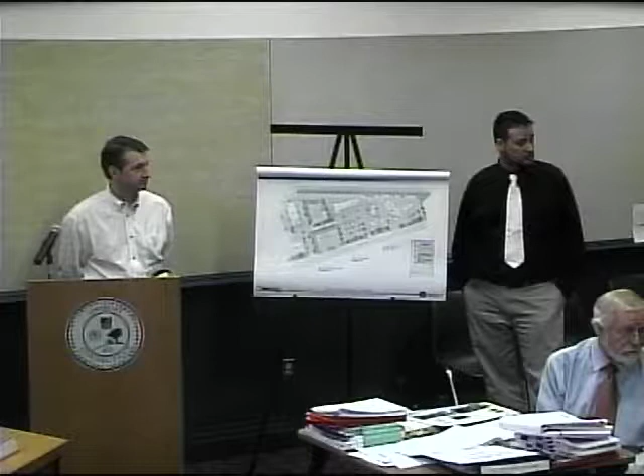Rob Pomeroy, Chairman of the Zoning Commission: I would suggest that since the Design Review Board has an advisory role to the Zoning Commission, they could advise the Zoning Commission that the Chrysler standard product would be unacceptable to the Design Review Board, but that the proposal by Mitchell of an alternative would be acceptable. That's a recommendation they could make as a motion to the Zoning Commission.

Also, as the board knows, if you've seen enough tonight and there's no other additional signage proposed, you could make this into a formal application this evening and speed it along to the next available Zoning Commission meeting, if that would help. I think it's fine, I'm comfortable with that.

Form ever follows function. It's an automobile agency, and it looks like one. I like the one on the right better, the brick one.

So you want someone here to make a formal motion to recommend to the Zoning Commission option 2? Well, we have to make a motion to make this a formal application first, right? If you would like, yes.